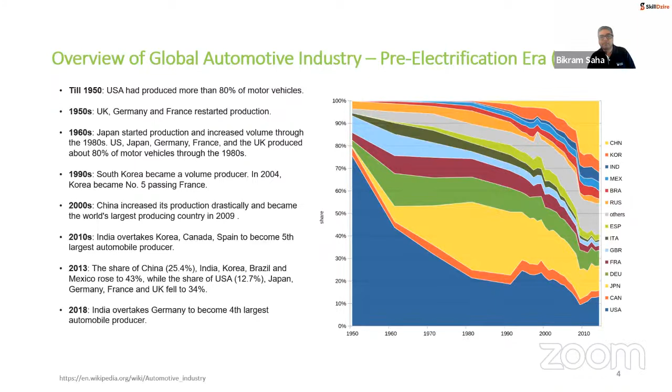As a matter of fact, in 2018, India overtook Germany as the fourth largest automobile producer. So this is the overall scenario for the last 75 years in this industry, predominantly fossil fuel dominated, before EVs came in very recent times.

Talking about the top 15 automobile manufacturers, this is the 2017 data. Volkswagen and Toyota are on the top. Sometimes Volkswagen is number one, sometimes Toyota is number one. Volkswagen is from the German group, mostly a European company, and Toyota is of course a Japanese company.

You see all the other players there, and this doesn't include Tesla and other EVs that have come lately in the market; this is the 2017 data by the OICA. You see the production numbers in million units. There is a drop in 2009, and still it is steadily going up.

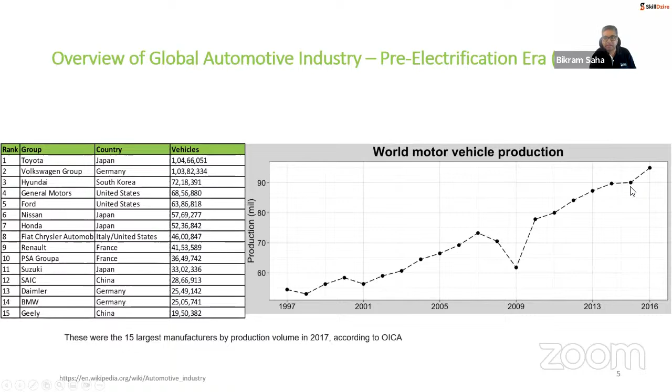Then coming to the main components of the vehicle. I think most of us attending know what the automobile components are, but just to revisit: the car engine. The car engine is the most important part of the vehicle because it gives you the power, and it uses gasoline and

converts that into mechanical energy, and the rest of the vehicle uses that energy to move you from one point to another, including converting it to electricity, which runs your ACs and other accessories on the vehicle.

And then you have the chassis. The chassis is the main structure of the vehicle. You might see some of the new structures coming up, like flatbed. If you go and buy Tata Motors vehicles, you see that they talk about ALFA structures and all. So they are just the platform on which the chassis is built and the vehicles overall have been built.

And there is a transmission system. You have the clutch, the gearbox, the differential, and the axle. This, I think, you pretty much understand what they are. And the body. So the control systems are there, the steering system, the braking system, all these things are there. And then there are auxiliaries. So auxiliaries like indicators, ACs, fog lamps. There are many auxiliaries that you can talk about.

And over the years, all these 5 components have evolved in a much better way. So you see the car engine has become more powerful, and it has become more efficient from the IC standpoint. Chassis has met the global safety standards on the crash. So there are global tests that have been done, and you give 4-star, 5-star, 3-star ratings to the vehicles. The transmission systems have become much more efficient. It can carry more load for the commercial vehicles.

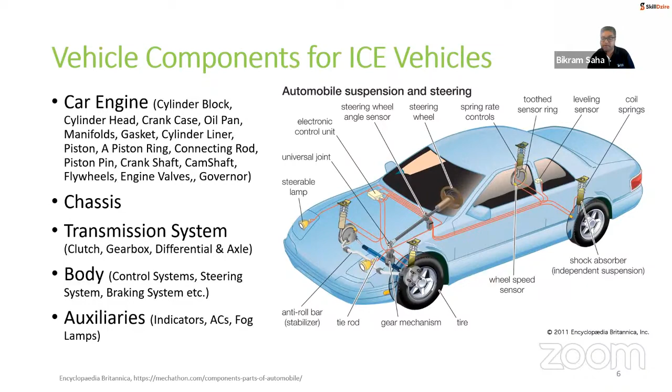Just imagine all these things have been removed by a simple motor. Okay, what will happen to those jobs? They're all gone, and there is nothing you can rework like this gasket and piston and all these things on a motor. No, there is nothing. So this transformation is happening. And this transformation has been happening for the last couple of years, and it is a truth today that EVs are more and more predominant, and the future is of course electric. Let me give you some more idea on that.

So what are the tasks people used to do in the pre-EV era? If you talk about the task and the background and the skills, it is a very simple mapping. People's job is to design, develop, and manufacture vehicles, improve any mechanism related to the vehicle, and do the testing and validation. That is how the manufacturer produces the vehicle and gets it to the market. From the background, you have the bachelor's, master's, or PhD in mechanical, automotive, or electrical engineering, who does all the design and development of that.

And then you have a host of downstream companies who supply your parts, and you assemble the vehicle and deliver it to the customer and do all the things like sales, service, and after-sales experience. On the technical know-how side, predominantly automotive companies need people from engineering and the system design perspective, so that they can make the vehicle and market the vehicle, and that is how the overall automotive experience mattered.

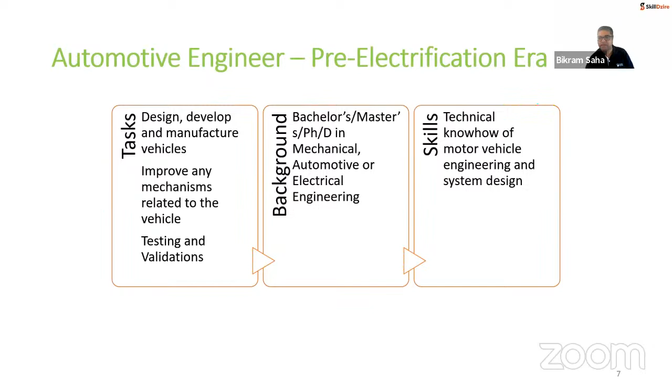Okay, now let me tell you a little bit about why the automotive future is electric. I'll tell you a couple of things on this. First and foremost is the pollution. So the major causes of air pollution, if you see on this, just give me a moment, let me see if I can get the, yeah. So if you see the center image, you see the major contributor to the pollution is the automobiles or the transportation industry.

Okay, and people have been thinking why there is a need to change to electric. Why can't the traditional, what we call the IC engines, work? They already have a stable industry, a stable supply chain. A lot of people are working, and their livelihoods are dependent on it. But now people are getting more and more concerned about climate change, and transportation is one of the major reasons for pollution. And so people are thinking whether we can minimize that.

So when you go to a city, you see that whenever you are in the center or where the traffic is very high, the air is very polluted because the NOx emissions from the automobiles or the transportation industry are very high. And that is why the government wants you to switch to cleaner mobility, which will have lesser implications on the environment and overall on the earth.

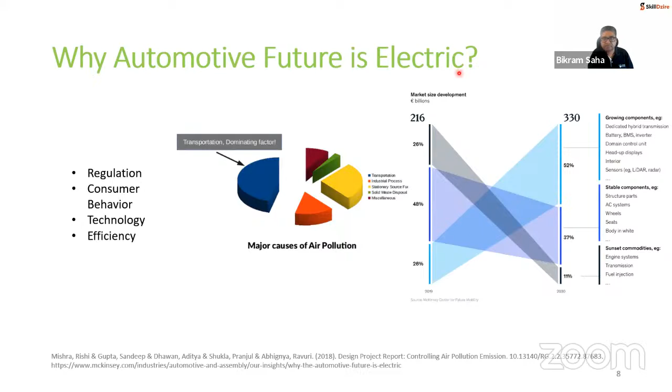Yeah, so you see the market sizing: in 2022 it was 8.5 thousand, and in 2030 it will become 39 million units globally, with a CAGR of 22%. It's a huge amount of vehicles that will come in. So you see how the change is going to happen. More IC vehicles are getting turned into electric vehicles. People who couldn't afford vehicles are also going to buy EVs. And so the market is going to switch from one end to the other.

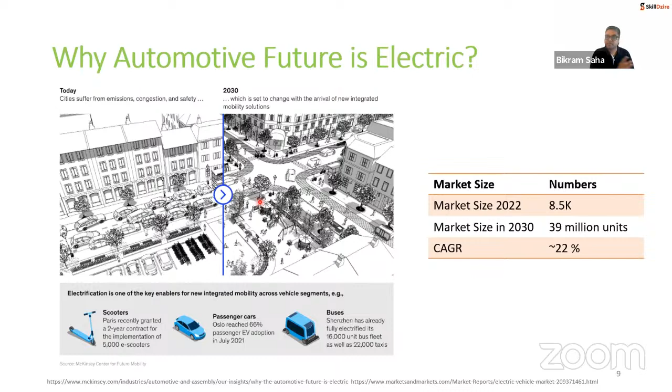So I'll talk about the energy part, why I talk about efficiency, why it is so good. Okay. So the first thing you have to understand is whenever I have gasoline power, gasoline is basically petrol, and there is diesel. So gasoline and diesel. If you go to the US, you will see gasoline and diesel. In India, we use petrol as the more common word for fuel, but gasoline is what petrol is.

So if you talk about IC vehicles, like a petrol or diesel vehicle, 80% of the energy is lost through various inefficiencies. Basically, if you give 100 calories of total energy to that vehicle, you actually use 20% of that, and the rest is dissipated. There are engine losses, other losses, drivetrain losses, auxiliary use. So only 16 to 25% of the energy goes to the wheels, and that is what drives it. So imagine how inefficient the system is.

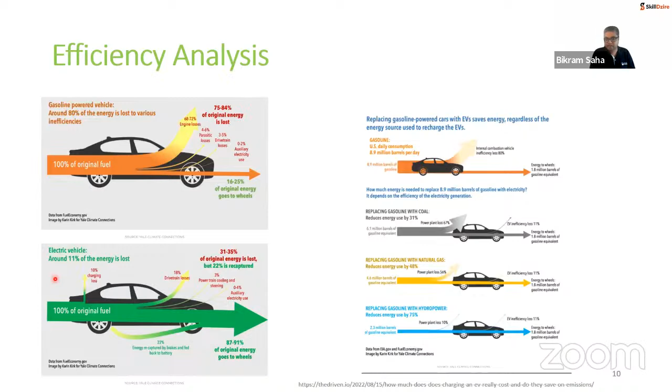So I have a small video which I want you to go through just for a couple of minutes, for a comparative understanding of whether electric vehicles actually pollute more because you need lithium and lithium needs to be mined. So just let me show you this video quickly. I just want to reshare it. I hope you can see.

So the argument goes, electric vehicles don't pollute, but the electricity powering the electric vehicles does pollute. Some even say it pollutes even more than a gasoline or petrol burning car. If we're going to look beyond the EV itself to the energy that powers it, shouldn't we do the same for the fossil-fueled combustion car? So what goes into producing the fuel that you burn in your car every day?

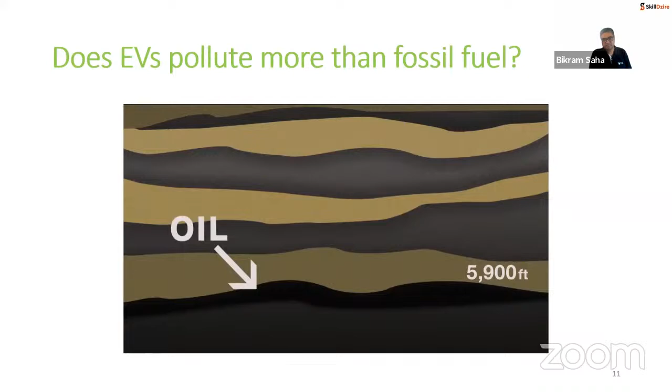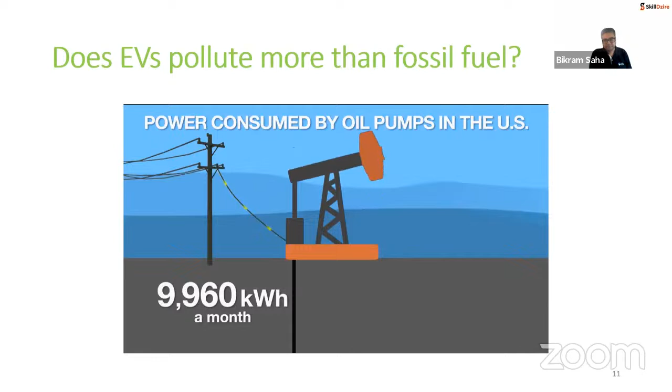Gasoline or petrol starts as oil, on average 5,900 feet below the surface of the earth. A great deal of oil is extracted using what is called a pump jack. Pump jacks don't run by themselves. In most cases, they use electricity. It takes, on average, 9,960 kilowatt hours of electricity every month to drive one pump jack. To put that in context, that is enough electricity to power a Tesla Model 3 for 34,860 miles.

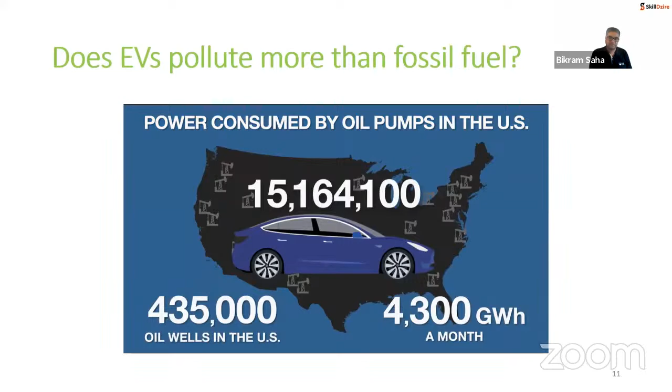In the United States, there are an estimated 435,000 oil wells using pump jacks. Estimated electricity use for these wells is over 4,300 gigawatt hours a month. That is a lot of electricity, and that is just to get the oil out of the ground. If we used that electricity to power electric vehicles directly, it would be enough to power over 15 million electric vehicles for a month. That's just US oil wells on land.

What about deep sea drilling? The most common way of powering an offshore oil rig is with a diesel generator. An average oil rig generator uses 20 to 30 metric tons of diesel per day. The electrical equivalent to this is 300,000 kilowatt hours. There are an estimated 1,470 offshore oil rigs in the world using over 1.3 billion kilowatt hours of energy a month. All this oil pumping combined would be enough to power 19.5 million electric vehicles per month. This is just from the energy used to pump the oil out of the ground in the US and offshore.

So not only does the fuel pollute when we burn it in our cars, we are also using a huge amount of electricity just to pump the oil that makes the fuel. Combining the pollution from the tailpipe emissions with the emissions generated to pump the oil out of the ground is not a pretty picture. And pumping oil is not clean. Millions of gallons are spilled into the ocean every year, causing havoc for fish and other wildlife.

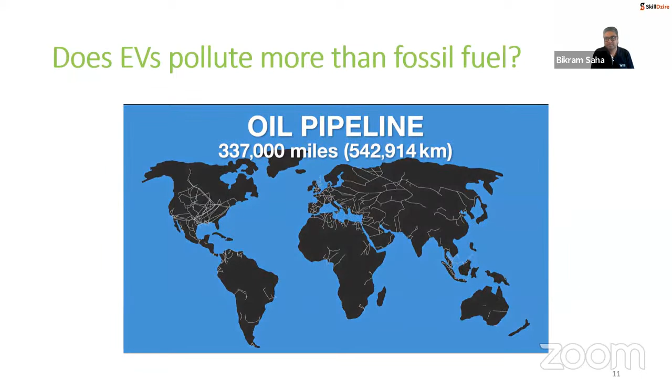Then that oil needs to be transported. Most of the oil is pumped through pipelines. There are over 337,000 miles of pipeline in the world, carrying most of the 100 million barrels a day we consume. These pipelines use pump stations that use even more energy. Oil is also shipped. The oceans are unregulated as regards emissions, so ships use the cheapest, dirtiest fuel possible to keep costs down, making them one of the largest pollution sources on the planet. Shipping is responsible for an estimated 1 billion tons of CO2 per year, and 10% of that is shipping oil.

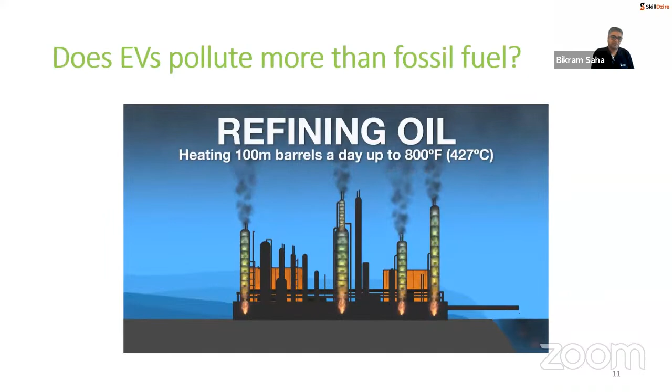Because these tanker ships pollute so much, many countries do not allow them to operate near their coastline, so they have to be towed into port where the oil is transferred to a refinery. Refining oil takes a huge amount of energy and generates even more pollution. Refining is done by heating oil up to 800 degrees Fahrenheit or 427 degrees centigrade. Heating 100 million barrels of oil a day to these temperatures requires an enormous amount of energy. Heating this oil generates so much pollution, refineries create a serious health hazard anywhere they operate.

Refineries are the number one pollution source in many major cities around the world. It is so bad that people living near these refineries have a marked increase of lung disease.

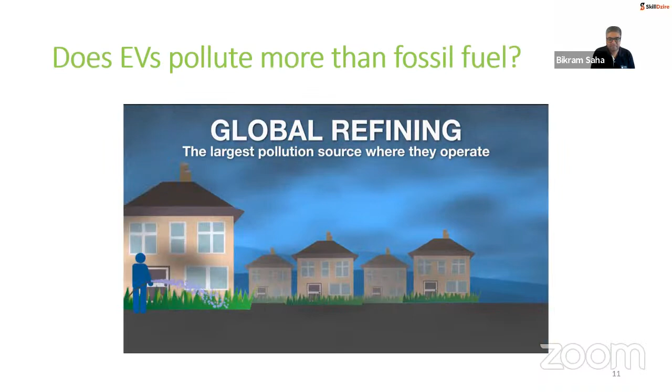Once the oil has been refined, it is transported to fuel stations in diesel trucks, creating even more pollution. Then this fuel is burned in cars and trucks, right in our cities where we live and breathe. These cars and trucks have internal combustion engines that are extremely inefficient. 70% of the energy from burning fossil fuels is wasted as heat, while only 30% goes to turn your wheels.

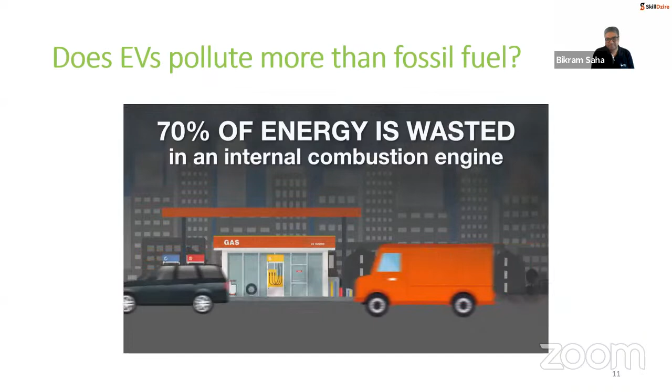So after we use all that electricity pumping oil out of the ground, refining it, transporting it, we then waste 70% when we burn it. Fossil fuel production is an incredibly dirty, inefficient process from start to finish. When we contrast all this to powering an electric vehicle, the difference is very stark.

Electricity does not need to be pumped from thousands of feet underground, transported with trucks or trains, or pumped along pipelines. It does not need to be shipped overseas. It does not need to be refined, and it is not polluting where we live and breathe. Even if electricity is produced from burning coal, the power plant is far away from population centres, transferred over power lines, keeping any direct pollution away from the population. And if the EV is powered with clean energy, it is clean from start to finish.

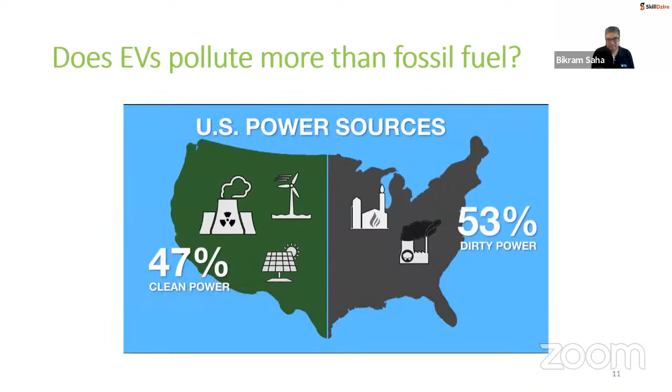In the United States, 47% of electricity comes from sources that emit no CO2. In Europe, it is even better at 56%. And the percentage of clean energy is growing every year as coal and gas plants are being replaced by renewable energy sources. So what about the lithium used in EV batteries?

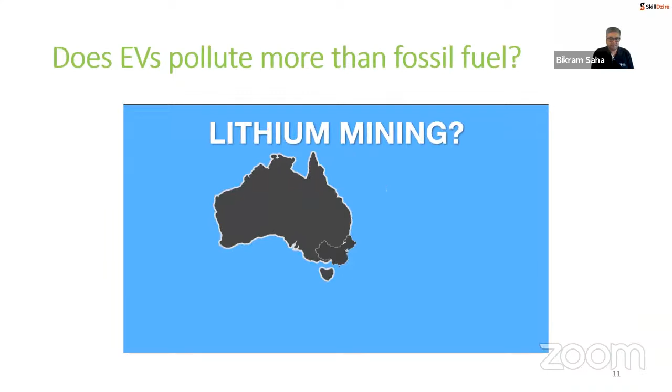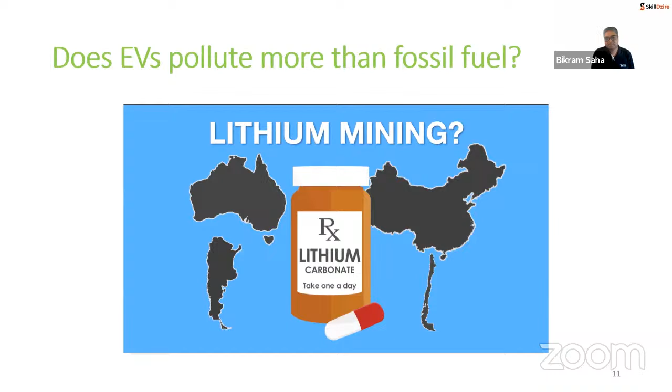Lithium is a metal that is mined in the deserts of Australia, China, Argentina and Chile. Besides being a key ingredient in batteries, lithium is also ingested as a medicine for bipolar disorder. Much has been made about the environmental impact of lithium mining, but this is all a little bit overblown. Australia is the largest producer of lithium in the world. If there were any major environmental problems with this mining, some Australians would be talking about it.

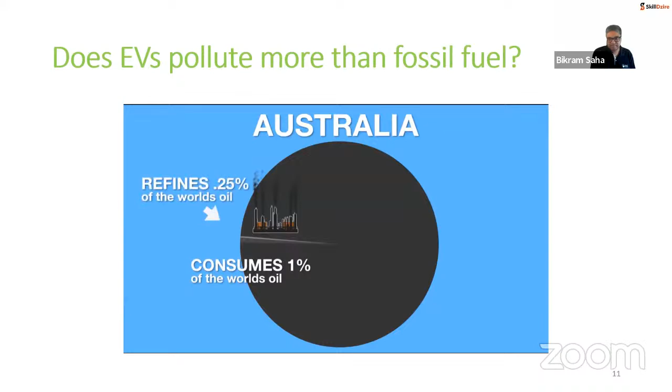But what is Australia really talking about when it comes to pollution? Oil refining. Yes, oil refining is creating a much bigger environmental risk than all the lithium mining going on anywhere in the country. Australia is not a very densely populated country. They consume 1% of the world's oil supply and only refine 1/4 of the oil they consume. But they mine 50% of the world's lithium.

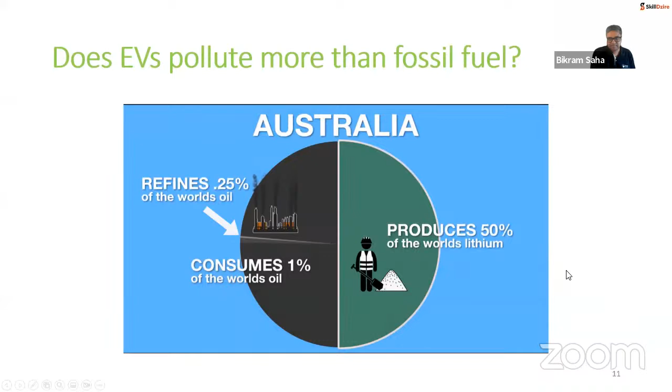So in a country that only refines 1/4 of 1% of the world's oil and mines 50% of the world's lithium, the biggest contributor to pollution and risk to human health is oil refineries. That does not even take into consideration the drilling, pumping, transporting and burning of this oil. This is just refining it.

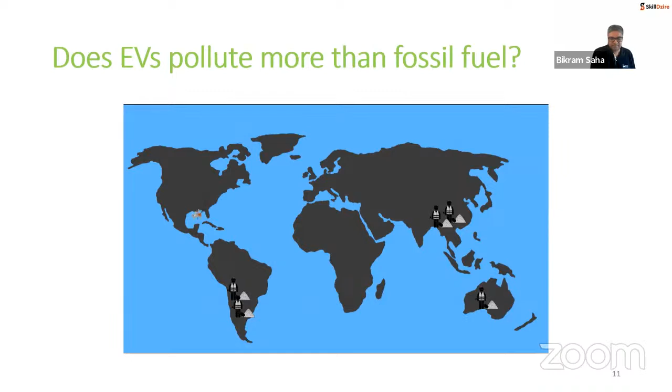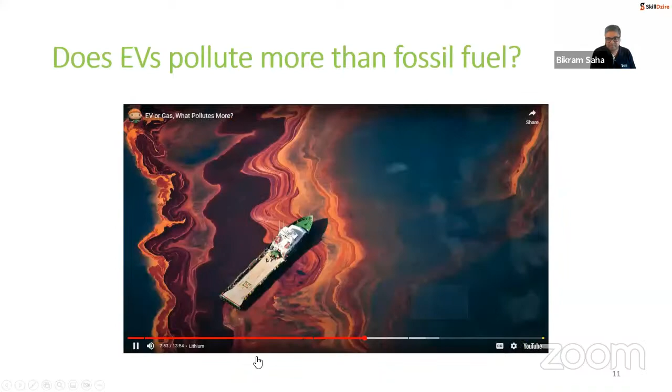The more you look into it, the argument that battery production is somehow as bad as the cycle of fossil fuels is ridiculous. All the lithium mining in the world to date has not done anything like as much damage to the environment as just one major oil spill. So, what about the batteries? What happens to EV batteries when they get old and are discarded?

When no longer practical in an electric vehicle, the batteries can be used as energy storage to power a home or business, giving them a second life. And when they're no longer any good for this, they are recycled, broken down. I think you have got a fair enough idea that the EV batteries are not that polluting in nature, and it doesn't do much harm to mine it.

So there is a scarcity of lithium, but over time, when recycling becomes a mainstream thing and the batteries in the vehicles get replaced, lithium will get recycled. So that is how things are. Now coming to the electric vehicle, the vehicle electrification technology. So you have three kinds of electrification.

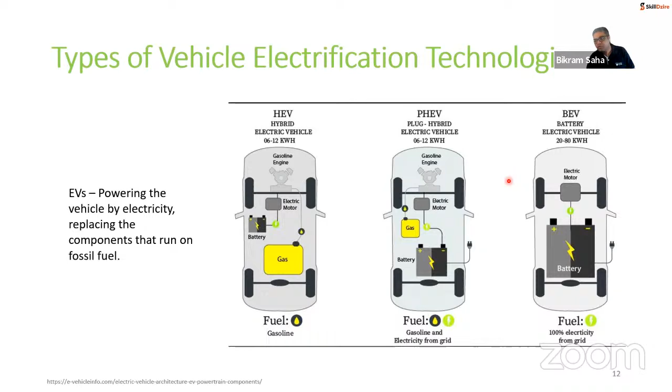And this is what we mean by electrification. So more and more, the source of the fuel and the components that use the fuel is being replaced by a simple architecture, which will have a battery and a motor. And the motor is one of the most stable solutions that we have on earth till now. The motor has also evolved over time, but right now, whatever we have in terms of the stability of the motor technology, it is very stable in general. It is the battery which is evolving over time, becoming more and more efficient, getting fast charging capabilities, and that is how this is moving in general.

So I'll tell you the most important concepts of the motor. There are 4 or 5 kinds of motors that we see. One is the brushless DC motor, the BLDC motor. You might be seeing that some electronic companies are also selling fans with BLDC motors. BLDC motors don't have much sound compared to other motors. It's very silent and very lightweight. So for two-wheelers and three-wheelers, BLDC motors are the most suitable in general.

Then the second one is a permanent magnet synchronous motor. This is one of the most famous for four-wheelers. If you look at electric cars in India, the most popular is the Nexon EV. Nexon EV uses the permanent magnet synchronous motor. This is newer technology, and it is even better in terms of that. Apart from that, there are AC induction motor, interior permanent magnet motor, and permanent magnet switched reluctance motor. These are used in four-wheelers. It depends on the technology that the company wants to adopt, but these are all the options that are there in general in electric vehicles.

And this powers the main energy. One more thing about these motors - these are traction motors. There is a difference between the motor that runs your pump and pumps water to your tank, and this traction motor. Traction motors' speed can be increased or decreased based on the electricity that you power. You cannot bring your pump motor and say I will reduce the electricity and the rotation of the motor will go less - no, it doesn't happen, it will just stop.

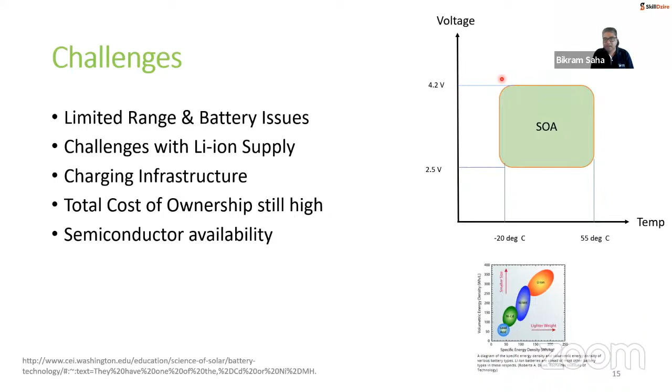Going forward, there is a lot of subject matter expertise needed for the EV era. I'll give you a very simple understanding of it. So you know the vehicle integration—I already talked about how to integrate the vehicle and system with battery, motor, and all.

There is EV design and engineering, so how do you design the overall EV and the engineering associated with it. All the mechanical systems associated with the vehicle, like how you generate energy from the motor and have the powertrain so the energy drives the wheels. Other mechanical systems like the chassis, the wheels, the suspension systems—all this comes under mechanical systems in general.

Simulation is something very important because you simulate and try to see whether the solution you're proposing is working well or not. So there's a lot of computer simulation you need to do on MATLAB and other systems that are available. There's a lot of opportunity in that particular area.

Of course, electric motor technology is the most important. People coming out as electrical engineers can get into electric motor design, and that has a lot of opportunity because I talked about 39 million EVs that will apply, some part of it in India. So there will be huge demand for motors and the maintenance of those motors. There will always be high opportunity in the next 15 years for this kind of people to go and work.

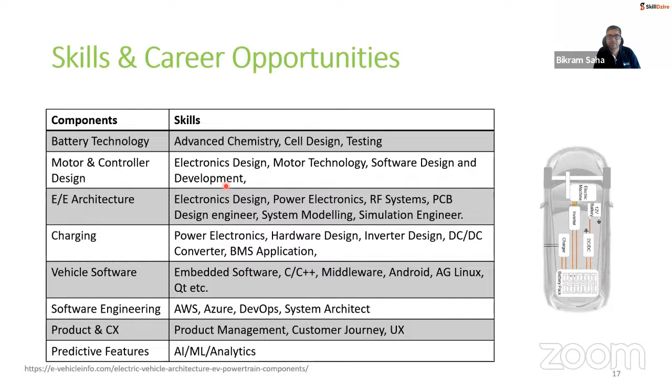So this is more or less the skills and component mapping going on in the EV industry. This is how I wanted to show the opportunities coming up for you. Any questions? I think I am coming to the end of the slide. We can pick up questions now and answer them in general.